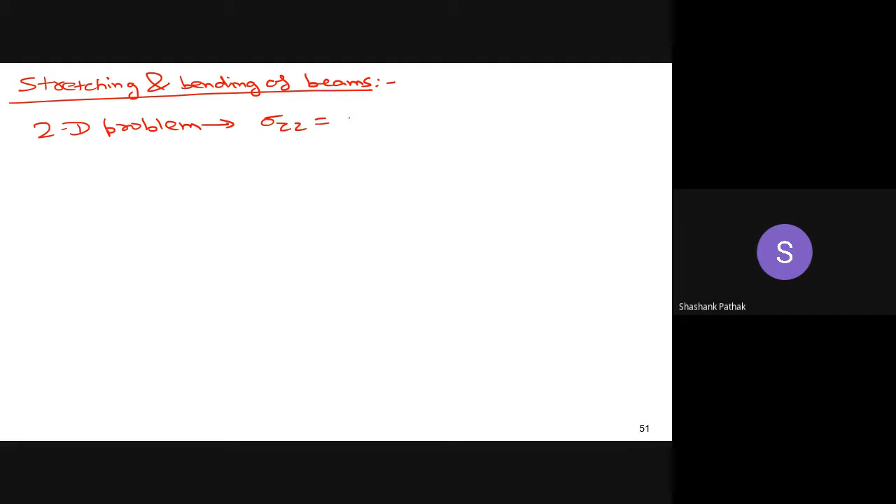Okay, so in the last class we started discussing about the stretching and bending of beams. We already started some discussions related to the boundary conditions, on stresses and the displacement. And then we stopped somewhere when we said that this is a 2D problem. Basically, we are saying that sigma zz, sigma xz, and sigma yz are all 0. So this is basically, you can say, a plane stress situation.

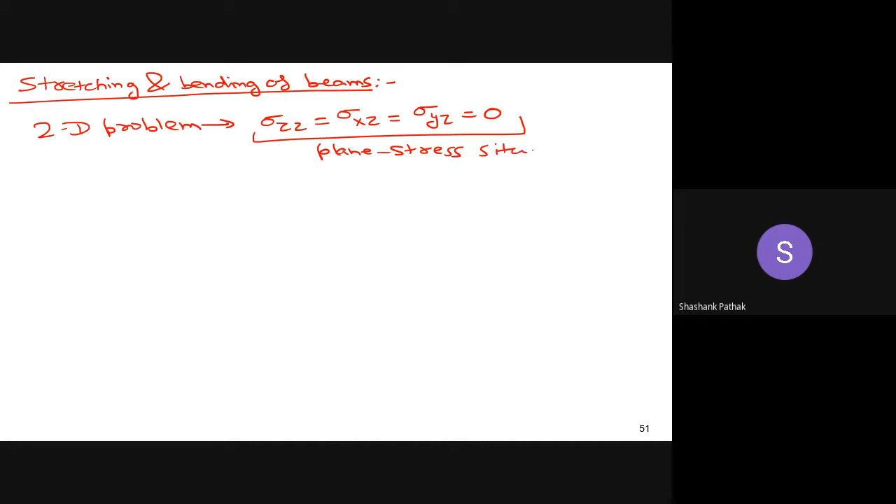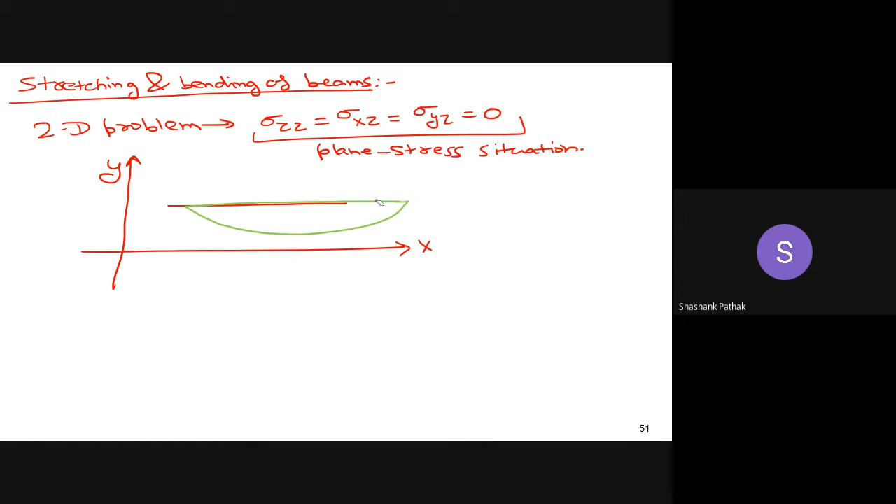Okay, so if this is your x, y, and this is suppose the center line of the beam. What we are trying to evaluate is the axial deformation of the beam as well as bending of the beam. So basically, what we want to study is this green curve that you see here. We want to analyze this green curve. This is basically the deformed shape of the beam in the xy plane.

So I have already done some initial discussions. Now, here are a few assumptions, because this is a very complicated problem, and without putting some assumptions we cannot solve it exactly. So there are some assumptions. The first assumption is epsilon yy is 0. This implies that strains in the y direction are basically 0.

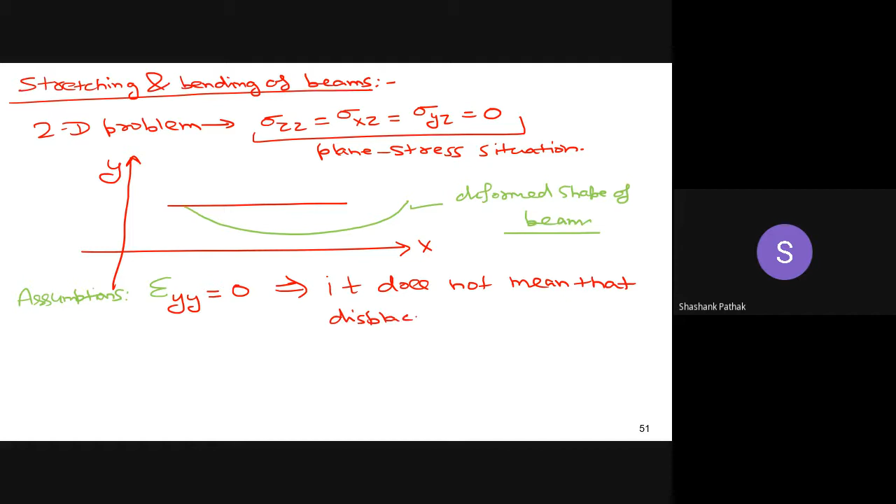But it does not mean that displacement in the y direction is 0. Can someone tell why? Can someone give an example that strains in the y direction are 0, but the displacement in the y direction is not 0?

So basically, if you see this beam, this displacement is happening along the y direction. So basically, uy is not equal to 0. But strains in this beam in the y direction are 0. So when you are talking about this strain, you are talking basically about the cross section of the beam. If you see the cross section of the beam, there are no strains in the y direction. So if you see the cross section, suppose this is y direction, there are no strains. No strains means this section is not stretching or contracting in the y direction, but all the points on this cross section are uniformly moving in the y direction.

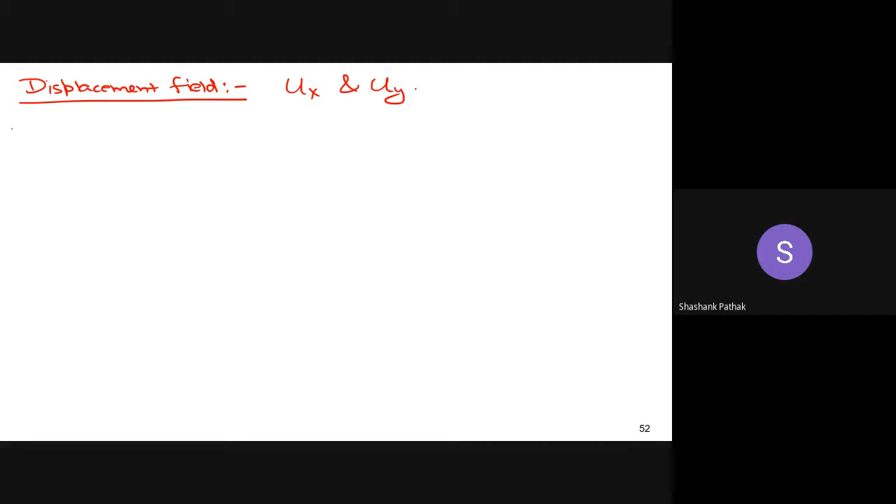So with these two assumptions, now we first discuss about the displacement field. So for the displacement field, because all the displacements are happening in the xy plane only, we are interested only in ux and uy. So first of all, uy, I have defined in the previous class.

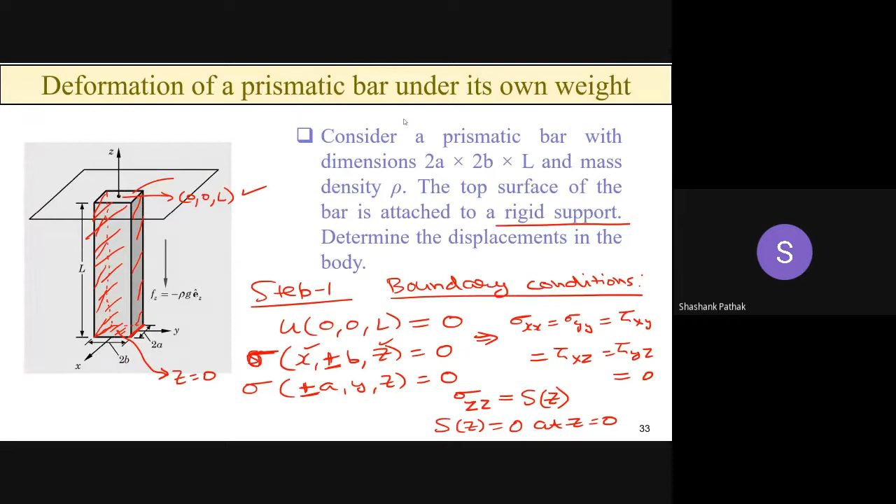So this was something we were discussing about this problem: the deformation of a prismatic bar under its own weight. When we were discussing this problem, you gave me the expression for this case. But currently what we are discussing is not this. We are discussing stretching and bending of beams.

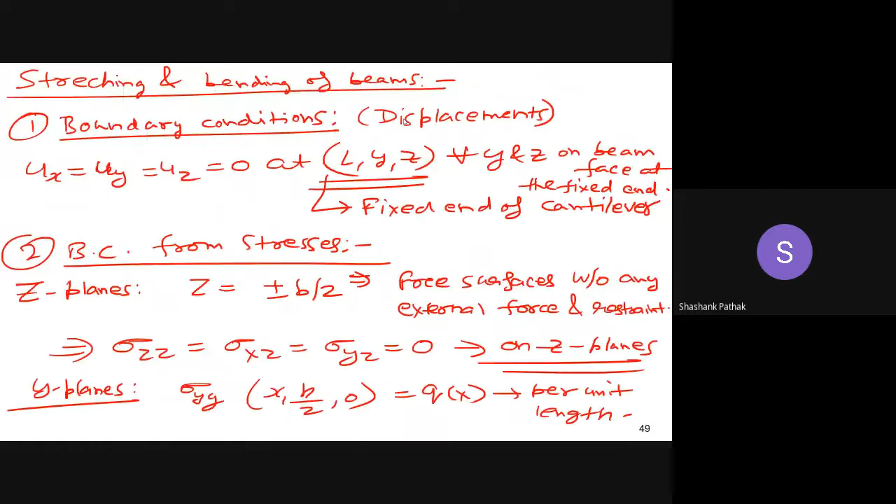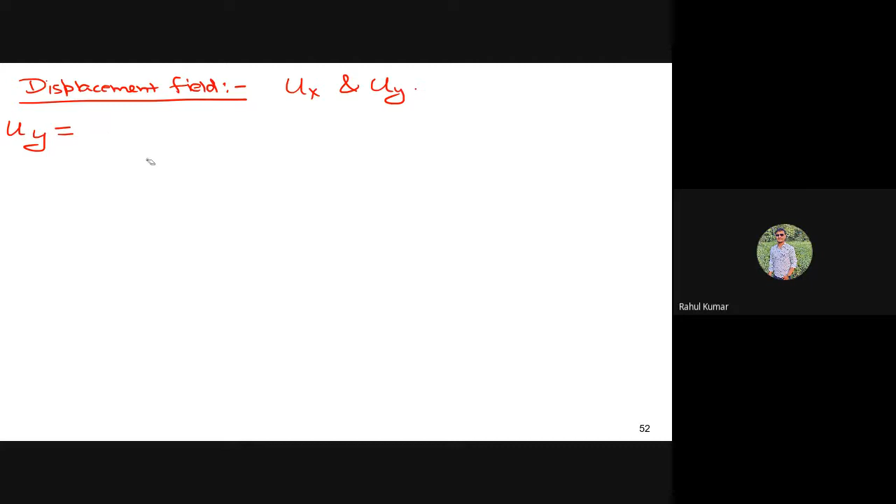Did you find the mistake? Rahul? Yes, sir, you gave this answer, right? Yes, sir. So did you find the mistake? Now tell me, what was uy when we were discussing this beam problem?

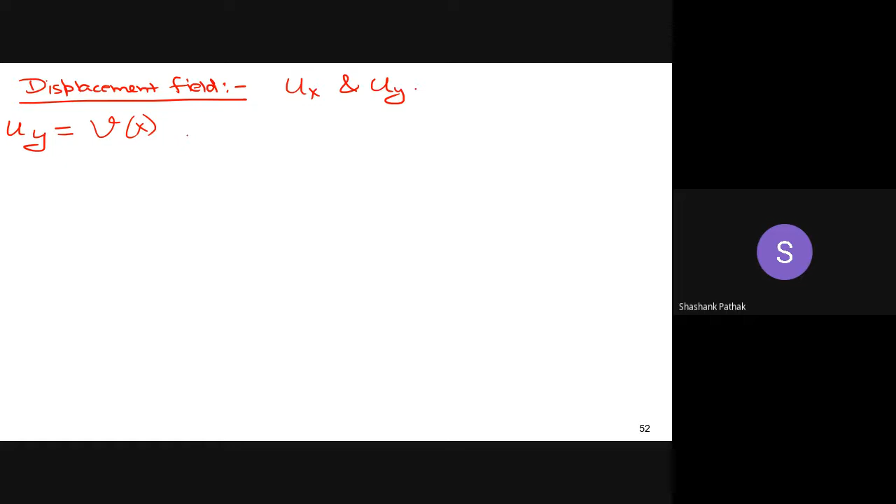Okay, no problem. So basically we defined it as Vx, some function V of x. It will depend only upon the x coordinate because this is the curve, the deformed curve of beam. So this is x, this is y, and this is the deflected shape of the beam, given by function Vx.

So uy is basically given by vx, which is only a function of x. Now, the assumption we made here was epsilon yy equal to 0. Is this assumption true for this case? It means epsilon yy is what? Del uy by del y. Now, this is del vx by del y, and this will be equal to 0 because vx is only a function of x. There is no component of y, so del vx by del y will be equal to 0.

So this assumption that we have taken here, because of that assumption only, we can assume that uy can be represented by this kind of function.

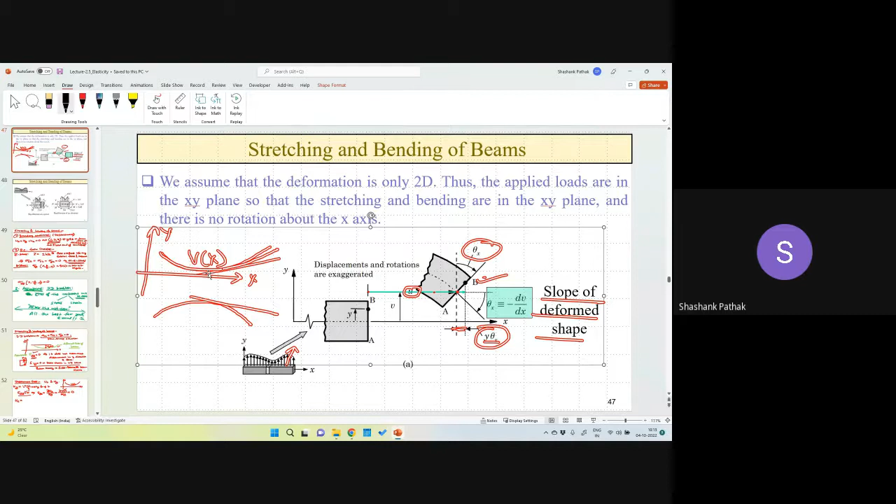Now we want to write ux, which is slightly complicated. Please see this diagram very carefully, I'm going to describe it. If you see this diagram, let me switch on this one. First, let me... okay, I cannot erase, I don't know why. Let me erase this first so I can make a more clear presentation. Okay, now okay.

So here I show my laser pointer. This point B is some general point on this cross section at a distance y from the neutral axis, from this axis. So we want to define the displacement field on this cross section for any general point B.

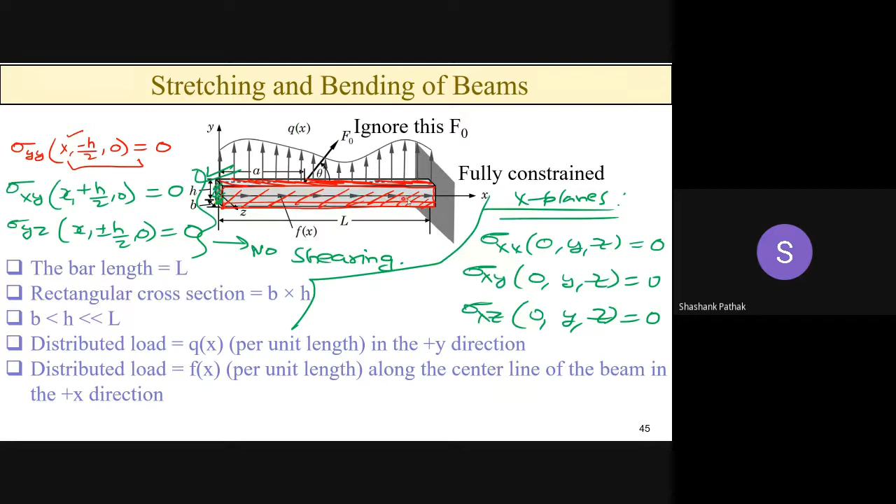So at the time of deformation, this kind of loading is being applied. This is a positive y direction, that's why loading has been shown in the vertically upward direction. The loading is also being applied along the x-axis, shown here. If you see this one, this. So again in this diagram, okay.

So when you want to write ux, you want to write the deformation ux of this point B. So when you write ux, because your beam, if you remember, I showed this diagram here, this beam is deforming in the x direction because of stretching, and it is also bending. If you see any small cross section, any small element just like this shown here, what is happening?

This centroidal axis is moving by this u. So this is basically u that you see here. So this center point is moving by u, and then this rotation of the beam is also happening because the beam is deforming in the y direction. That's why this rotation is also happening.

Now this rotation can be measured as a slope of the deformed shape, which is minus dv by dx. We are using a minus sign here because this deformation is happening like this. If you see, the loading is in the vertical direction, so this deformation is happening like this, and that's why we are putting a minus sign for the slope.

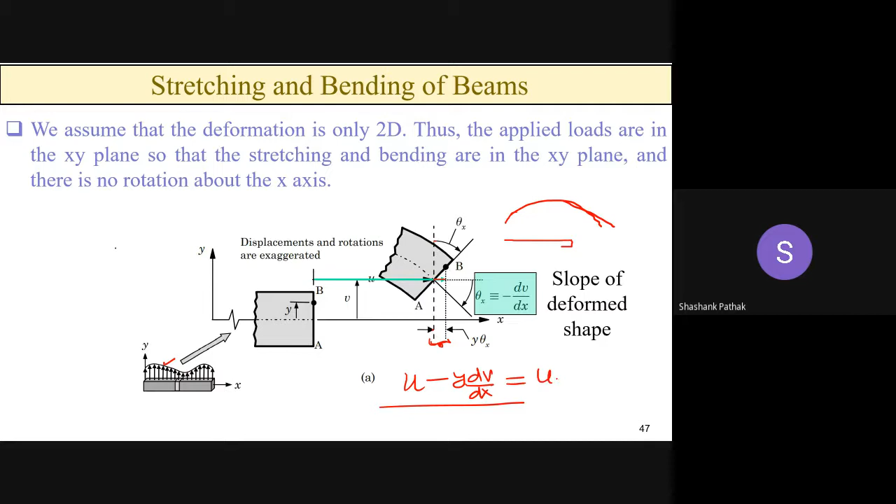So net displacement of B can be written as u minus y dv by dx. Basically, first B is going like this, and then because of rotation, it is again slightly coming back, which is y dv by dx. That's how you define your ux. So ux can be written as u of x, which is the stretching of the beam, minus y dv by dx. V is also a function of x, as we have seen here.

So we can write the entire displacement field as ux x cap plus uy y cap. This is your displacement field of any point on the cross section.

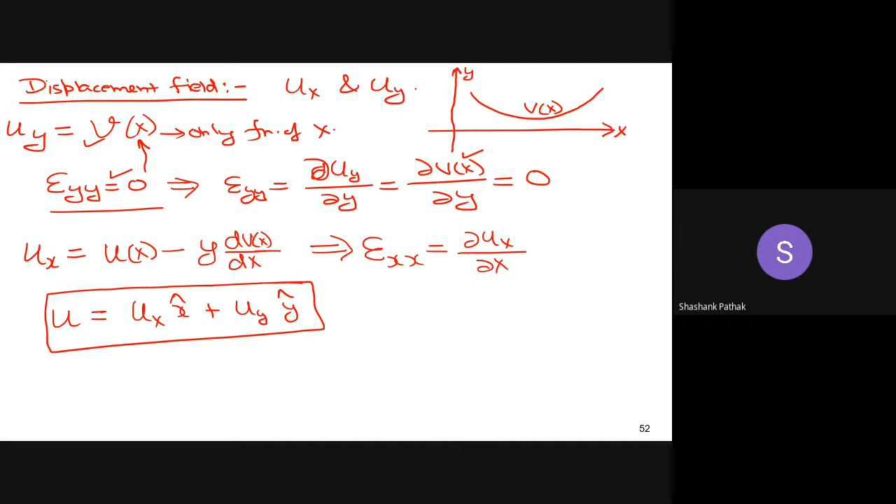Now we can also write epsilon xx. So epsilon xx is what? Del ux by del x. Now, because you see this is only function of x. Oh no, there is a y also there, but you want to differentiate it with respect to x. So what will be the differentiation?

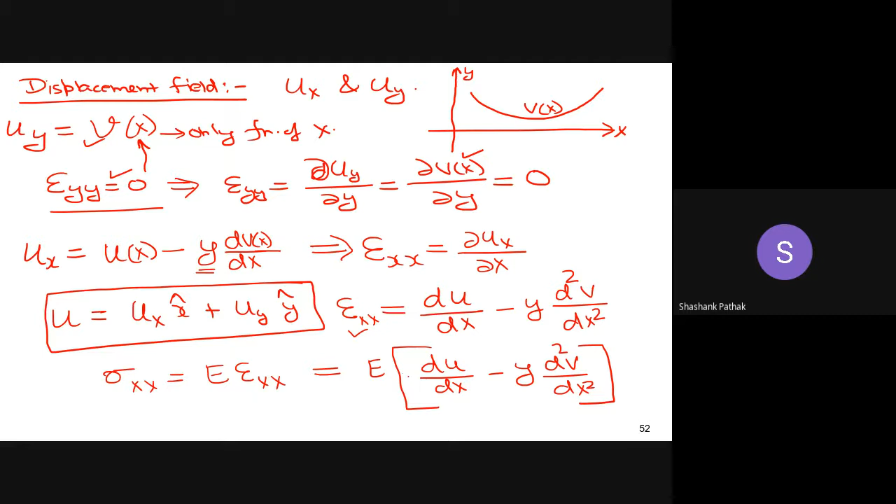So if you see this diagram here, in this diagram, is my screen lagging for everyone or only for Shivansh? Is someone also facing the same problem?

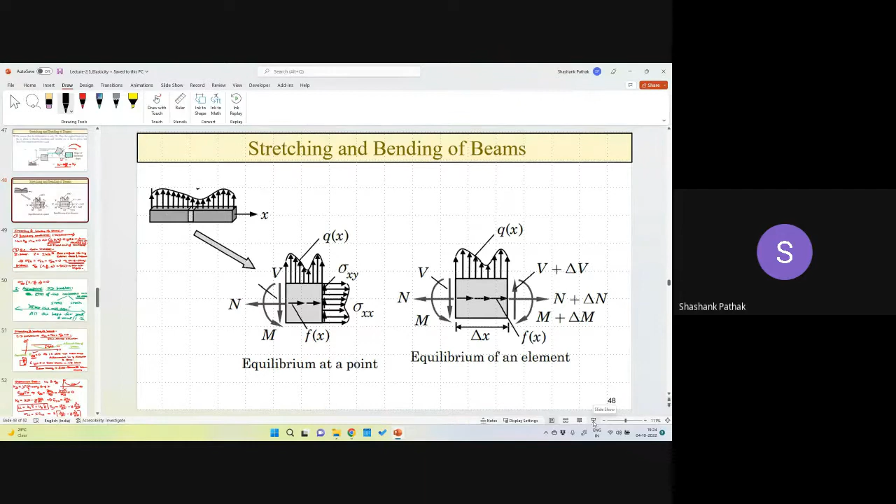So as far as your emotional support is required, I can say these words to you. I understand it is really difficult and sometimes it may be very depressing that you are not able to come here, attend the classes. I understand totally. That is the situation with everyone, not one of you. It is sometimes difficult even for the teachers to explain and describe the concepts, but what to do, that is the best all of us can do. So don't worry, keep your spirits high, these things will happen, and one fine day they will be sorted out also.

So here I was discussing this sigma xx. If you cut a small section in this beam, you see this is sigma xx basically, this is sigma xy, this is qx. So basically these stresses, if you take the resultant, they will provide you the shear forces, bending moments, and axial forces. So how can you write these stress resultants?

Stress resultants. So you can write like nx will be basically the integral of sigma xx dA over area A, where A is the area of the cross section. If you integrate this sigma xx over the entire area of the cross section, you will get nx.

Similarly, for bending moment, you can basically integrate y into sigma xx dA. Sigma xx dA will give you the force, and if you multiply by y, this is basically the moment of the differential force. If you integrate over the entire surface area, this will give you the bending moment at a distance x.

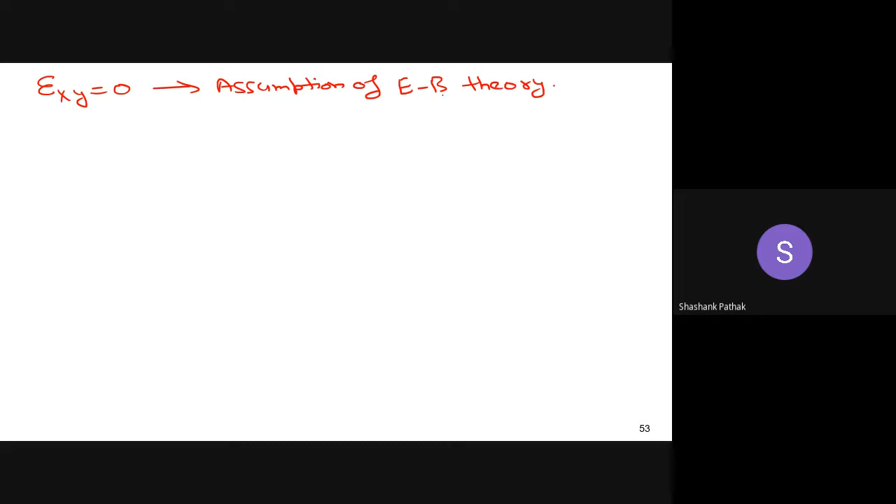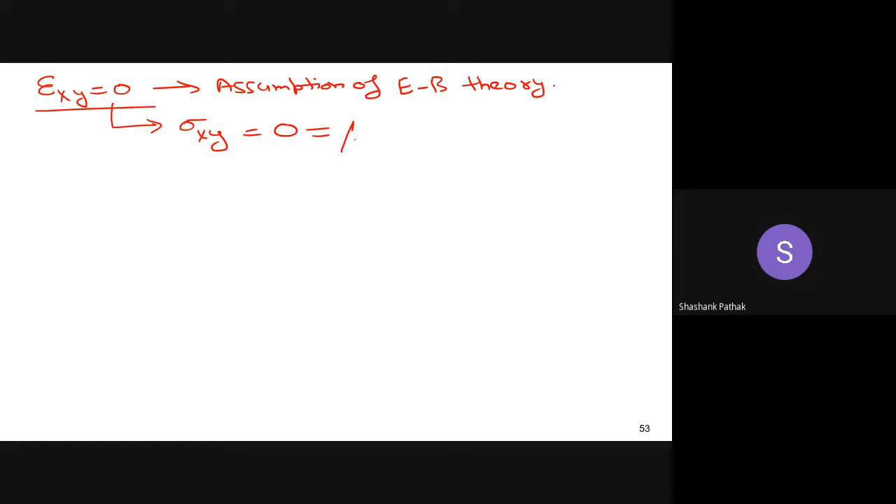Now here comes something very interesting that you have to listen very carefully. Basically, we know that epsilon xy equal to 0. This was the assumption of Euler-Bernoulli beam theory, that shear strains are 0. If this is 0, then sigma xy will also be equal to 0, because you can write it as mu times gamma xy, so it is directly proportional to epsilon xy, which is equal to 0. It means sigma xy is equal to 0. If sigma xy is equal to 0, what is Vx? Vx is the integral of sigma xy, and this will be equal to 0. It means shear force is 0.

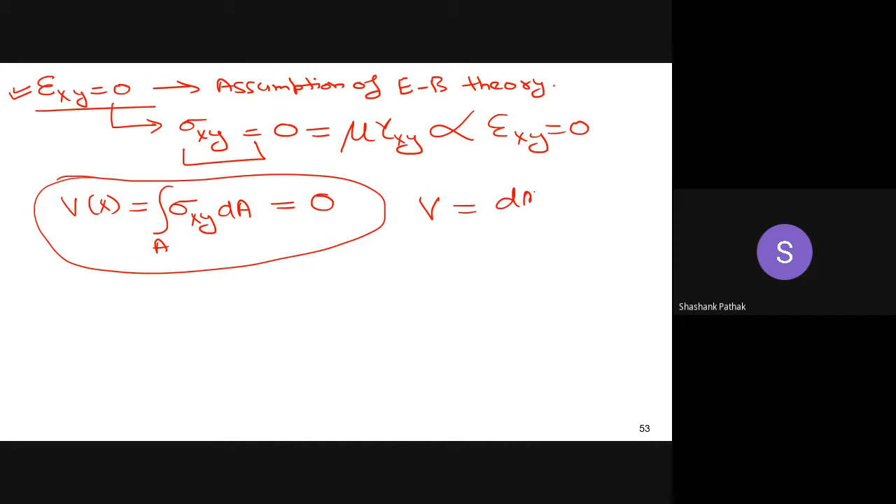So now you see that this assumption is creating all these paradoxes. We also know that V equal to dm/dx, but Vx equal to 0, it means m is equal to constant. It means bending moment is constant throughout the beam. But this is not true. It is saying that your bending moment diagram is constant. So how can it be true for any general type of loading? It cannot be true. It means your beam theory is true only when m is constant.

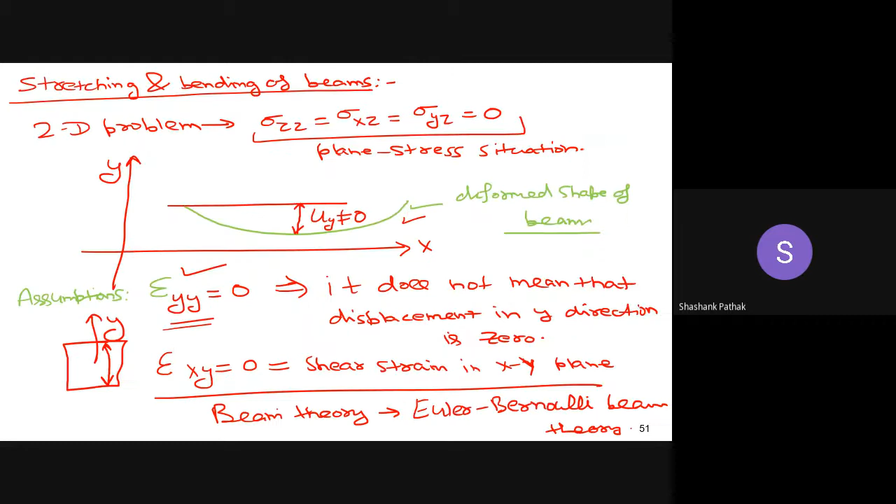So these are some limitations of the Euler-Bernoulli beam theory. Now what we actually do is take V equal to dm/dx. There were three equations, right? There was this equation, dv/dx plus qx equal to 0, the shear force equation, coming from the equilibrium in the y direction. If you see this thing, if you put dv/dx as d square m by dx square, and put this here, you get d square m by dx square plus qx equal to 0. So basically for calculating V, we are not using sigma xy, we are not using that.

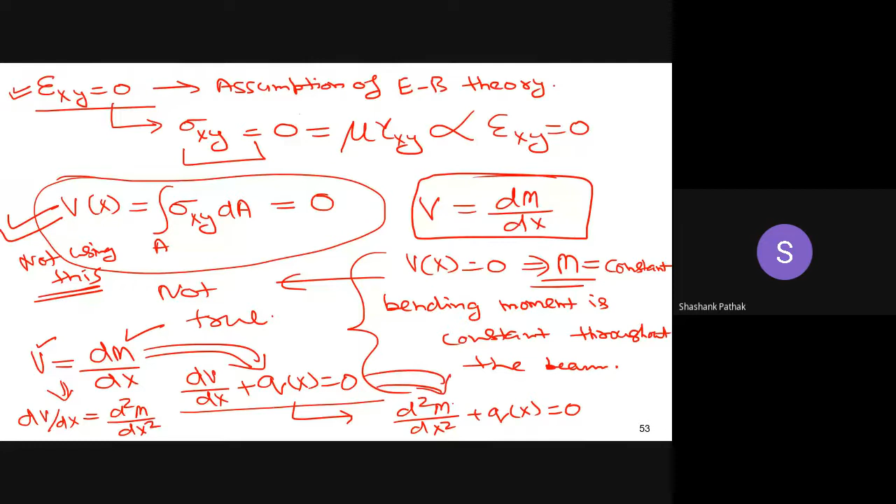We are directly using this relation. So we are using this relation, and that's how we can write this one, and then we can write this one. So now basically we have two effective equilibrium equations that we need to understand.

One is dn by dx plus fx equal to 0, which is governing the axial forces or stretching of beam.

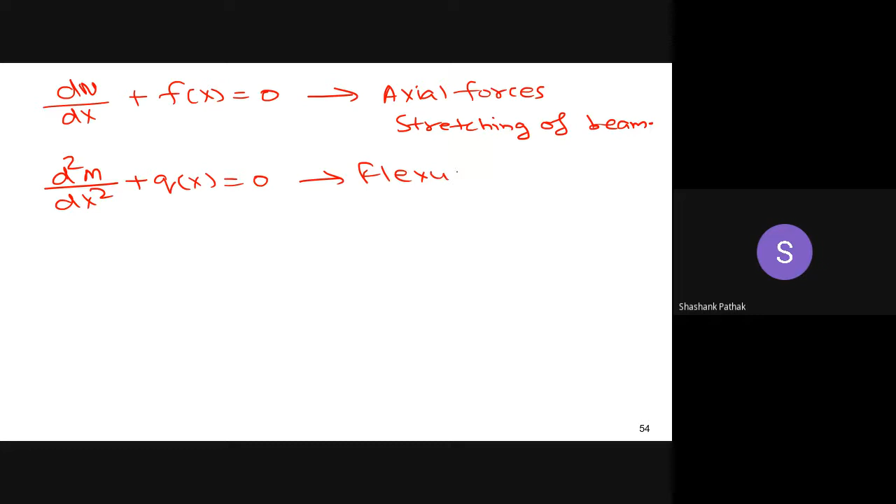The second equation is d square m by dx square plus qx equal to 0, which is flexural stresses, governing the bending of beam. So we have these two equations. If we solve these two equations, we can get the stretching of the beam and bending of the beam.

Now let us go ahead with these equations. So first we will start with nx. So we have written nx as sigma xx dA. Now sigma xx is what?

We have also calculated sigma xx earlier. Can someone tell? Shivansh? See in your notes. Can you please tell from your notes what we have written for sigma xx?

So E du by dx minus y d square v upon dx square. Okay, good. So this we have written here.

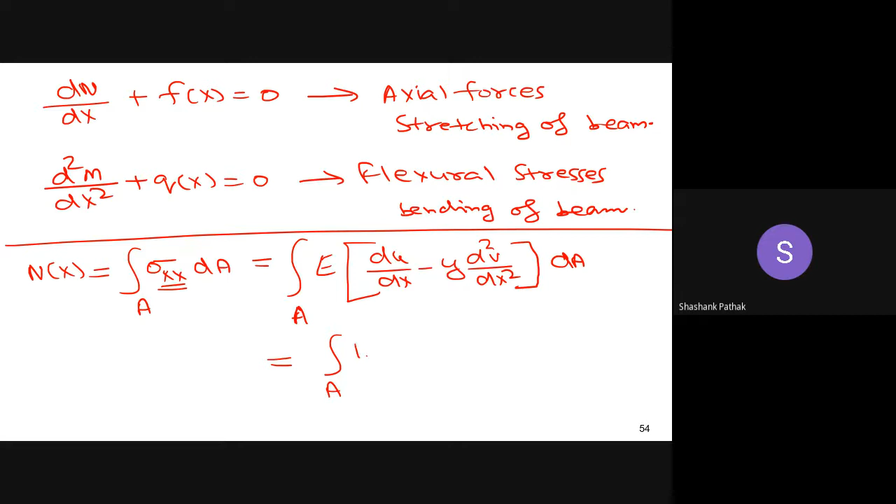Now we will take E inside: E du by dx into dA minus E y d square v dx square into dA, over A. Basically I have expanded the integral.

Now if you see this du by dx, and this d square v by dx square, these are only functions of x and do not depend upon y and z. And your differential area dA is basically area of your cross section, which is dy into dz, and this is only dependent upon x. This is also only dependent upon x. E we have considered constant, or you can say E is only dependent upon x. This is also constant.

So what we can write? We can write E du by dx integral over area dA minus E d square v by dx square integral y dA, integral over A. This is basically the expression for nx.

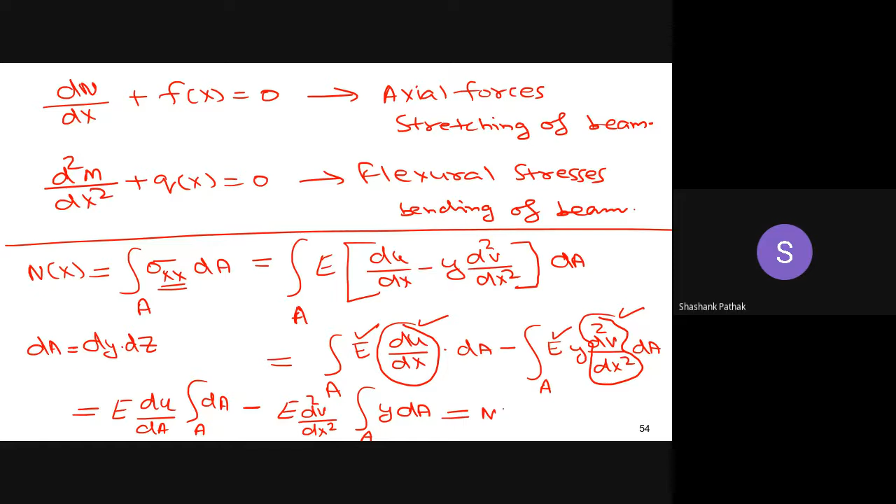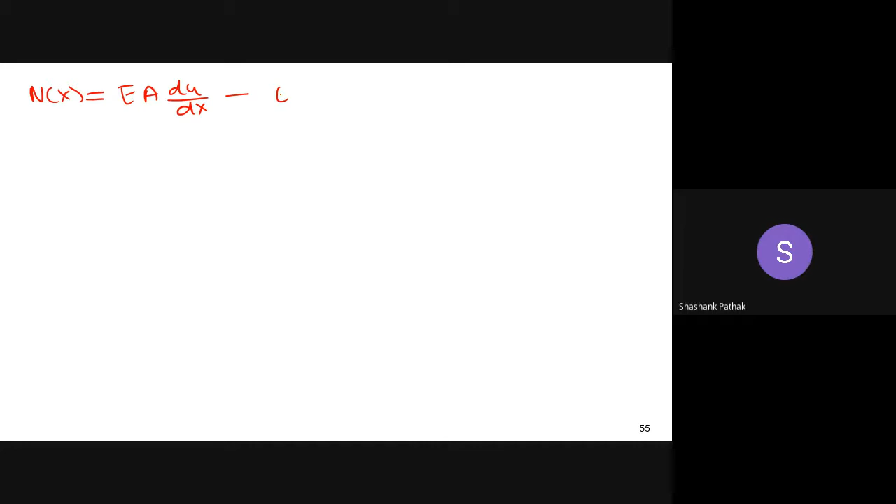Now I will write again here. So nx is basically EA du by dx, because your integral over dA will be A, area, minus E d square v by dx square, integral over A y dA. So basically this integral y dA, this will give you what?

Can someone tell what is this? Integral y dA. dA is some differential area and you are multiplying by y. So basically what you are trying to do, suppose this is your cross section. Moment of area.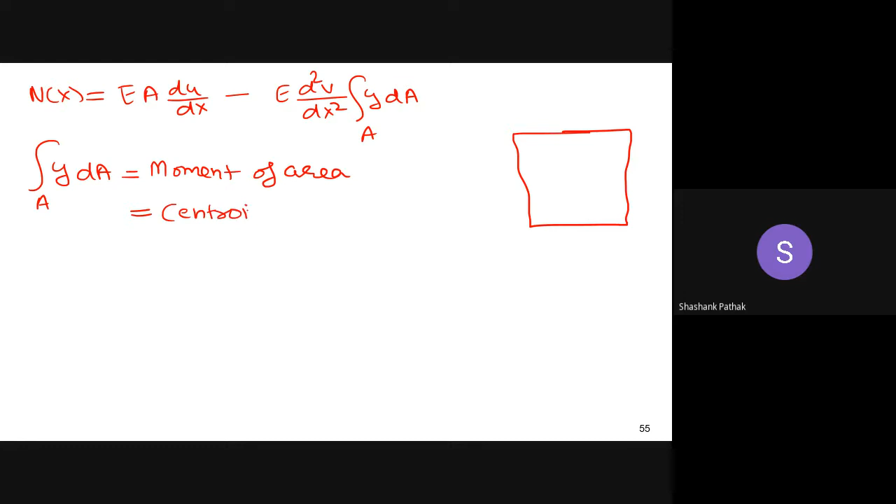Very good. So which is also physically giving you what? Centroid of cross section. So basically if you also divide this with area, multiply by 1 by A, this will give you the centroid of the cross section, right? So centroid is basically this.

0, 0. So what you have done, basically integral y dA will be equal to 0 for uniform cross section, symmetric system. This is basically equal to 0.

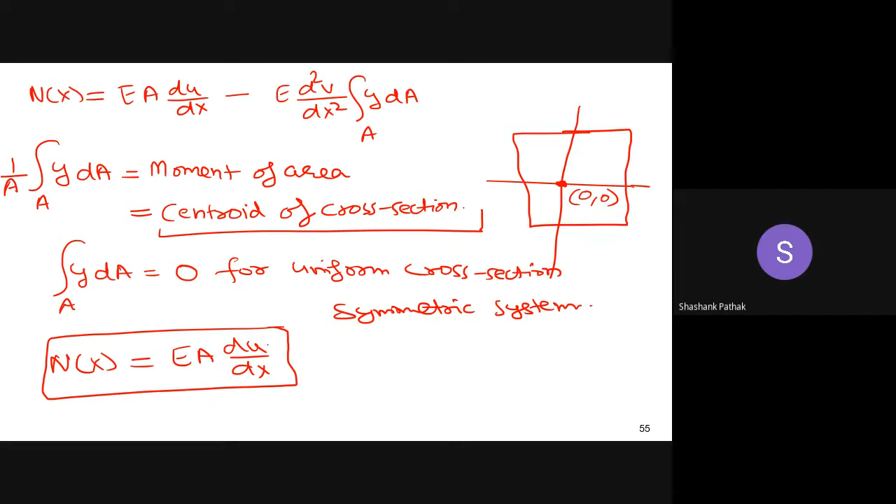If you put that, then you get nx equal to EA du by dx. So what was u? U was your stretching of beam as a function of x. So using this equation, you can relate the axial force with modulus of elasticity, area of cross section, and du by dx. So this is basically the equation of stretching of the beam.

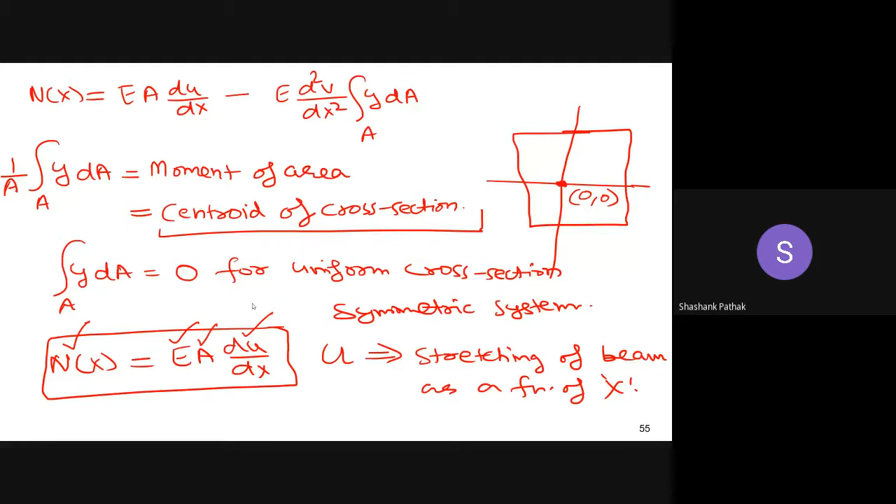Now similarly, moment can be written as y into sigma xx dA. Now again put sigma xx here, integral A y. So can someone tell what is the expression for sigma xx? Saugandh?

E into du by dx minus y d square v divided by dx square. Correct? Is it correct or is it okay? Yes, sir. Okay, y into E, this and then dA.

Now let us expand this one. So how we expand? E y du by dx dA minus integral A, E y square d square v dx square into dA.

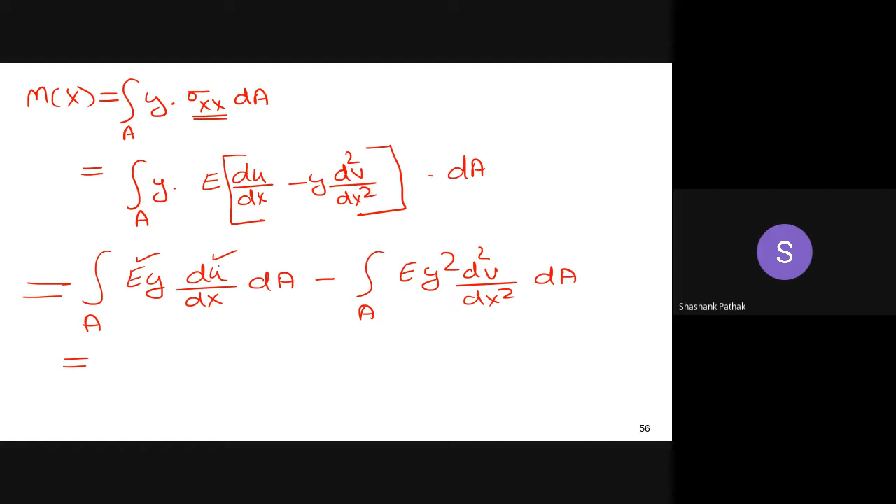Now again E is constant throughout the cross section. du by dx is dependent only upon x, not on dA. So we write E du by dx integral A y dA, minus E can be taken out, d square v by dx square can also be taken out. Inside A we have y square dA.

Now this will be equal to 0 because this is your centroid, and this gives you what? Moment of inertia. Moment of inertia.

About which axis? Centroidal axis. What is that centroidal axis? X, Y, or Z? Y. Is it Y? Yes, sir.

Everyone? Sir, x-axis. X axis. Are you sure? Anyone else?

So if you see the cross section, right? X axis is something that is going inside the plane of this paper. And this is your Y axis, this is your Z axis, and X axis is going outside.

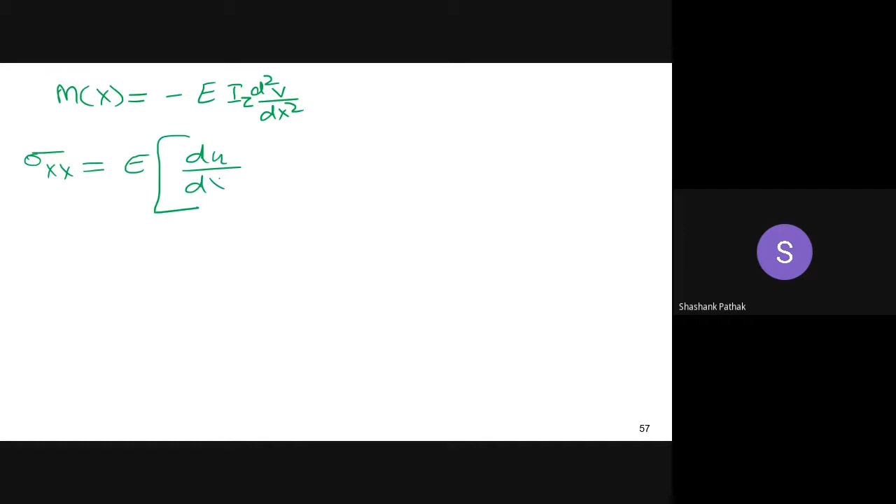Now we have basically sigma xx equal to E du by dx minus y d square v by dx square. So if you put inside, so you have written nx as Ea du by dx. It means du by dx is nothing but nx upon Ea. Similarly, you have written what? This one.

So from here, you can write what? D square v by dx square as mx by minus Eiz. If you plug in these values here in this expression, you again get sigma xx as E. So du by dx is basically nx upon Ea, and then you have what? Minus y d square v is minus mx upon Eiz.

If you put that, you get what? Nx upon A plus my. So E will also multiply my by Iz. This is your sigma xx. So this expression is quite familiar to you.

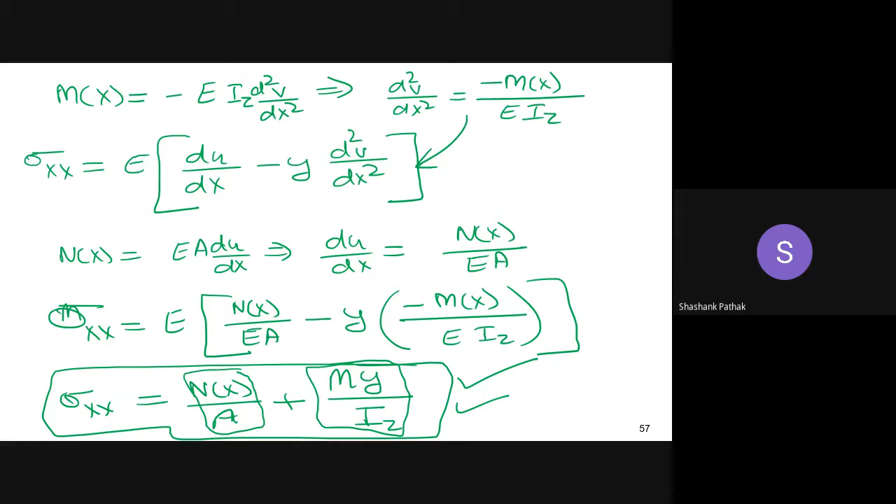Now ultimately we are interested in the deformations. So we want to write equations for deformation. Again, we go back to the equilibrium equations. So your first equilibrium equation was dn by dx plus fx equal to 0.

Again, if you put the expression for dn by dx, which is basically your nx was Ea du by dx, it gives dn by dx as Ea d square u dx square. We are assuming that E and A do not depend upon x, so we are writing like that. Ultimately, if you put this thing here in this equation, what you get? You get Ea d square u by dx square plus fx equal to 0.

Or this can also be written as, if you do not want to put basically E and A out, you can also write like minus d by dx of Ea du by dx, if E and A are also depending upon x, equal to fx. So this equation that you get here, this differential equation basically is equation of equilibrium in terms of displacement u. This represents the stretching part.

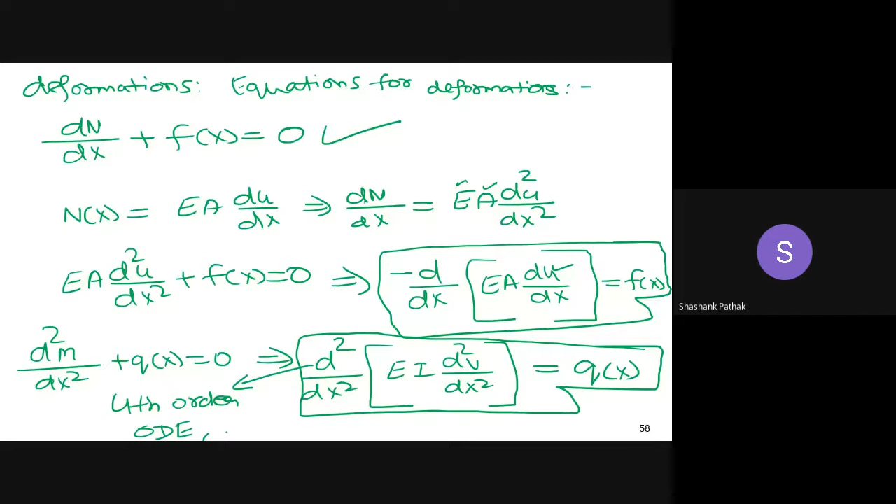This is fourth order ordinary differential equation or partial differential equation? Ordinary. Ordinary differential equation. Is it homogeneous differential equation or non-homogeneous differential equation? Non-homogeneous. Non-homogeneous. Is it, what is the degree of this differential equation?

First degree, fourth order, non-homogeneous, ordinary differential equation.

So this should be very much clear to you. That's how we get our equations of equilibrium in terms of displacement. Now for given qx and given fx, you can solve this differential equation and get the expressions for u and v. That is basically your Euler-Bernoulli beam theory, which you have already studied. Now we have derived it in much more detail.

Now moving on, I am going to talk about a simple principle, the superposition principle, which is equivalent to eating a very big burger. So have you taken a burger at KFC, McDonald's, Burger King, and maybe some other brands I'm forgetting.

You might have taken a big veggie burger, chicken burger, mutton burger, something like that, a hamburger. You might have seen some burgers that are very big, so big that they are even bigger than your mouth, that you can't take inside in one bite. So what do you do? Sometimes you try to cut them, or there is another way of eating that burger: first you take the salad out of it one by one, then you take a few pieces of tomato or chips if they're putting that, you take that separately, then the thickness is slightly reduced and then you can open your mouth. So basically you eat the big burger in pieces, and ultimately you get the same amount of energy or the same sensory pleasure even after eating the burger in pieces.

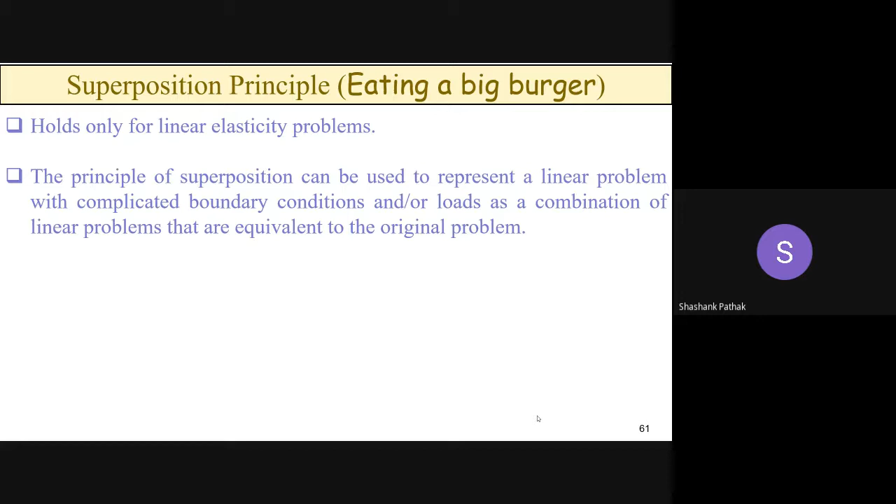The principle of superposition can be used to represent a linear problem with complicated boundary conditions and or loads as a combination of linear problems that are equivalent to the original problem. So this is basically like a complicated burger you want to break down into small pieces and then eat.

So if you see this thing carefully: these are the loads, this is one boundary condition, but here they have put one spring of stiffness K. And they want to solve this problem. To solve this problem, they can break it into two pieces. The first piece is you remove the spring.

You apply only a simple UDL on a cantilever beam. So this problem is solvable.

And the second problem is: because this spring will try to apply force, since this beam is being lifted in the upward direction, this spring will try to bring it down. So this spring will apply a force in the downward direction at point A. So here they have removed the original spring but applied the spring force, and this becomes a cantilever beam with a point load, along with a cantilever beam with UDL. So with the combination of these two problems, you can solve this problem.

So for the first problem, let us try to solve for, say, suppose we want to know the deflection at point A. That is our objective: we want to know the deflection at point A.

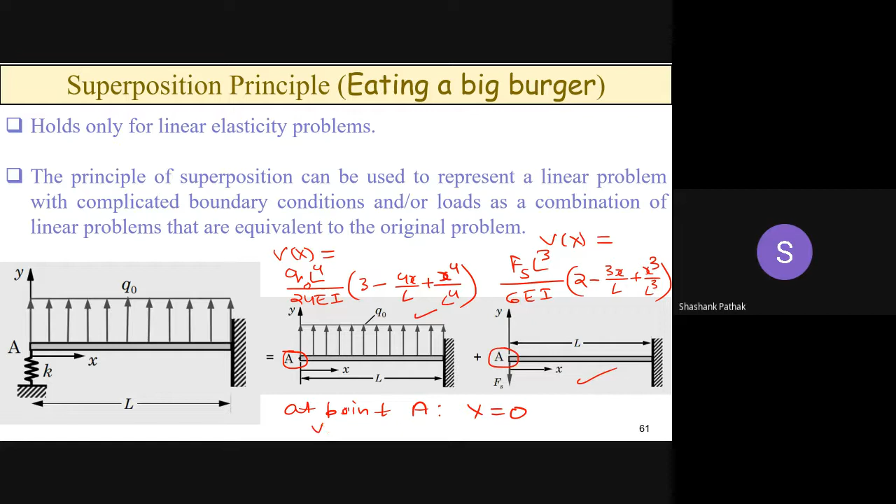So now you have Vx for these two systems, let us focus at point A. If you see point A, x is equal to 0. From the cantilever part, the deflection of A in this system and the deflection of A in this other system - if you sum both, you have to put x equal to 0 in the cantilever part, in this part and in this part. So you get Q naught L4 by 8EI minus FsL cube by 3EI.

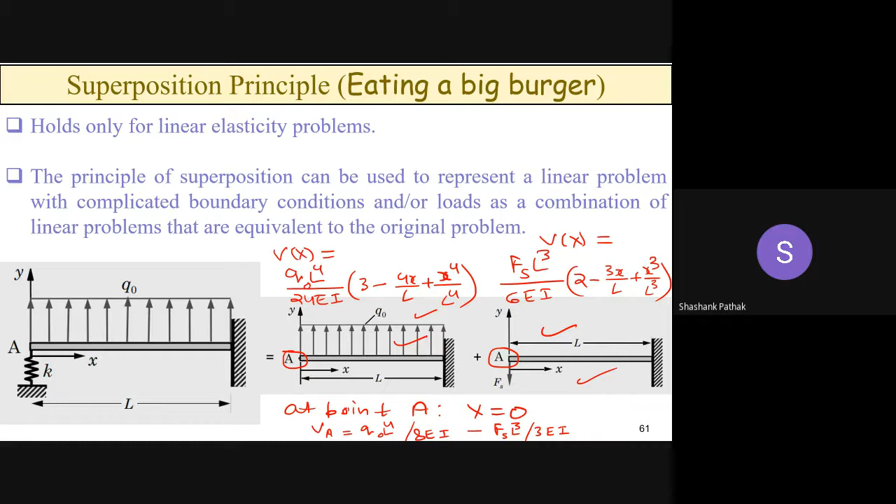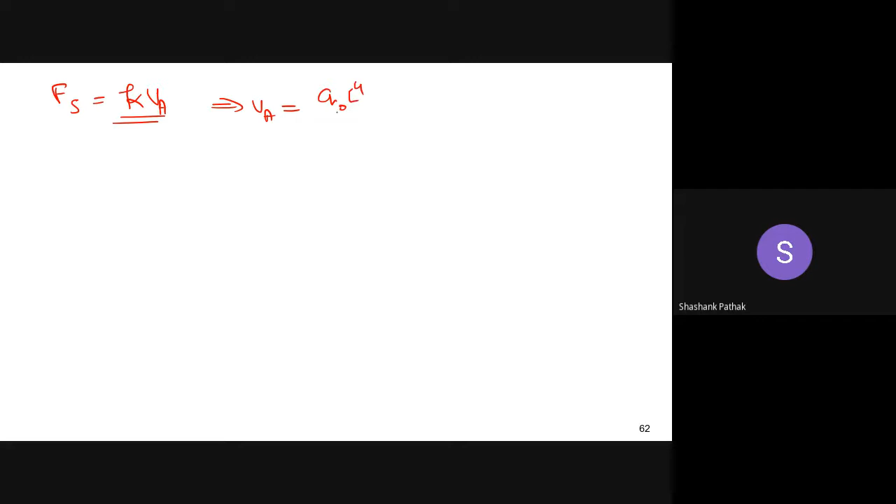Now the spring force on A is Fs, which can be written as K into VA, the deflection of A multiplied by the stiffness of the spring. If you put this expression in, VA becomes equal to Q naught L4 by 8EI minus K VA L cube by 3EI.

Now using this, you can write VA, the deflection at point A, as Q0 L4 divided by 8EI, all divided by 1 plus KL cube by 3EI. You can do that.

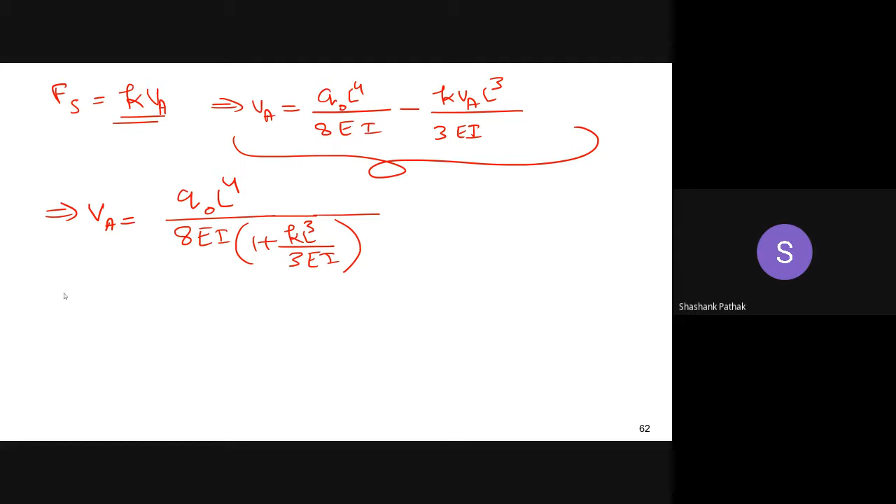So like that, you can calculate the deflection at point A using the superposition principle.

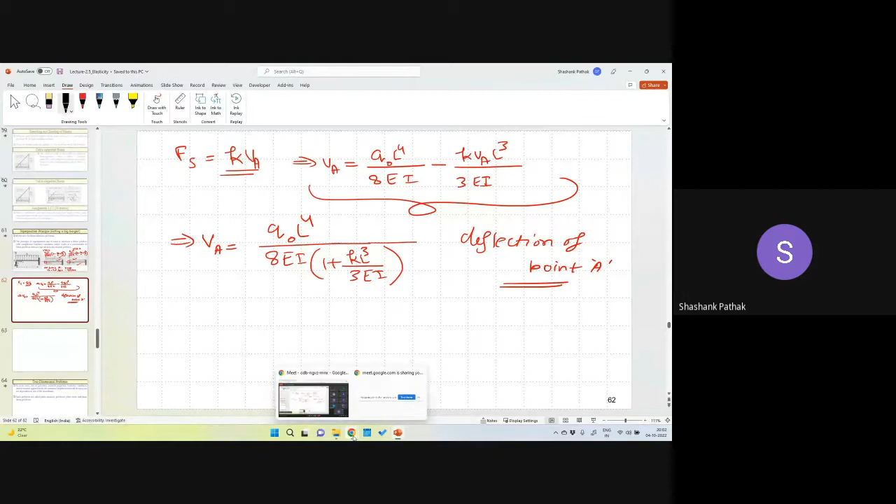Saurabh, you want to discuss something? Yes, sir.